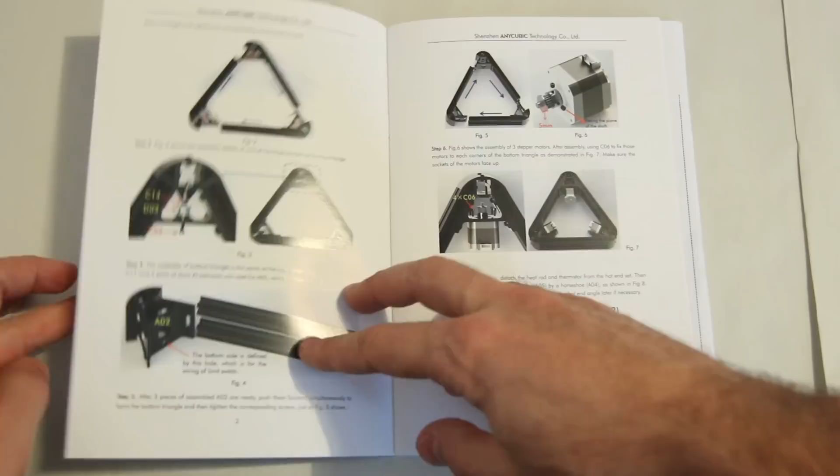I'll just go through it quickly and you can pause the video and watch. Packing list. Assembly of the bottom and top triangles. Extruder: this printer has a metal extruder, which is very good. The head itself is a type of E3D head. There are linear slides and the variant with rollers, but I have bought the linear slide version. It costs about $200.

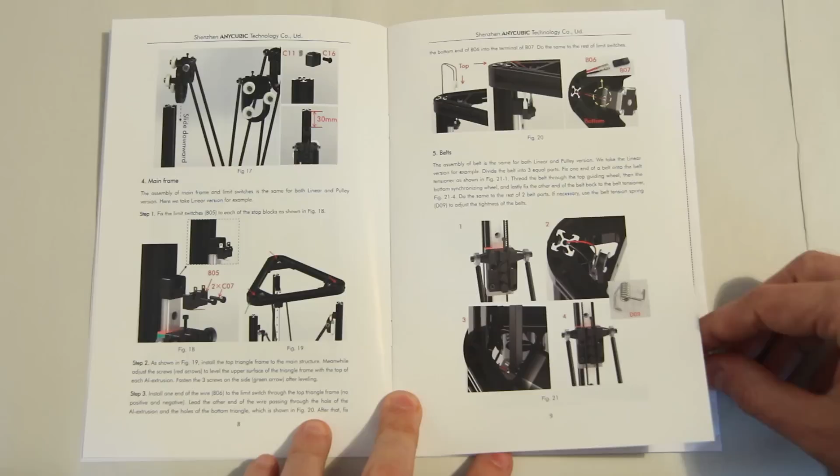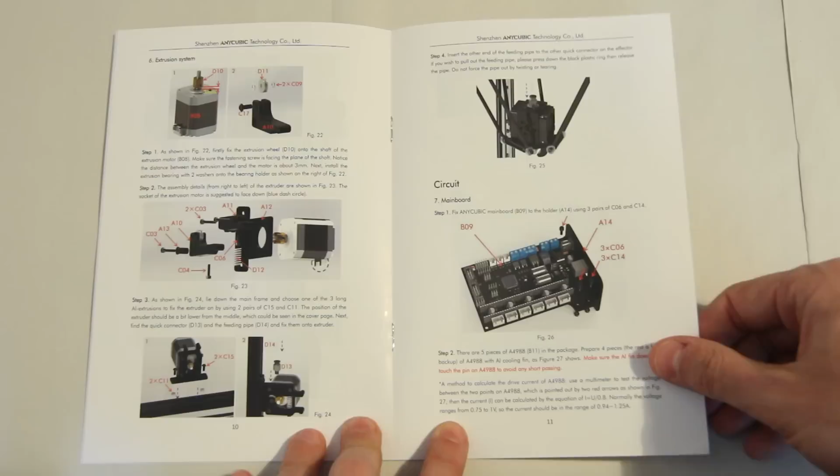Here is the assembly of the end stops. Extruder: the extruder is entirely made of metal, which is very good. The board is a fully integrated board, which is a type of Arduino Mega compatible one with RAMPS 1.4.

Wiring of the board: X, Y, Z axis, and 2 extruders. The kit comes with 5 Pololu-type drivers, but only 4 are needed, A4988 stepper motor drivers. Only 4 of these are needed for this printer because it uses 3 for the axes and 1 for the extruder.

The bed is a piece of glass, but I have also bought the heated bed as an option. It has a display in the kit, 2 lines or 4 lines times 20 symbols each, and then a section on firmware setup, which will come at the end.

And that's it for the other piece of paper which was in the box. Some instructions, with links to videos on YouTube for assembling, as well as a Google Drive directory for the firmware updates that they give. And this is a packing checklist of all the parts in the printer. That's it for now, next we'll look at the parts inside.

I'll zoom in to show you this. Here is the extruder motor, and for comparison, next to it, the motor for the axis. You can see it's significantly larger. They're both NEMA 17 motors, but this one is deeper. Here is a close-up at the writing, if you can see it.

Back to the parts in here. Cables for the stepper motors. Power supply. This power supply is not powerful enough to support a heated bed.

However, you need to purchase a separate one. This is the heated bed, which was an optional part. I bought it separately, even though they now have a version of the printer which has a heated bed by default. I'll set it aside here.

The top triangle, maybe we can position this so they are better visible. The top triangle and bottom triangle. These are normally 3D printed in a typical Kossel, but in fact in this set they're injection molded.

These are the rollers for the top triangle for holding the timing belts. As you can see, these are not the normal ball bearings, two of them. Instead, they are spools with an integrated tiny little ball bearing inside, which I think is very good.

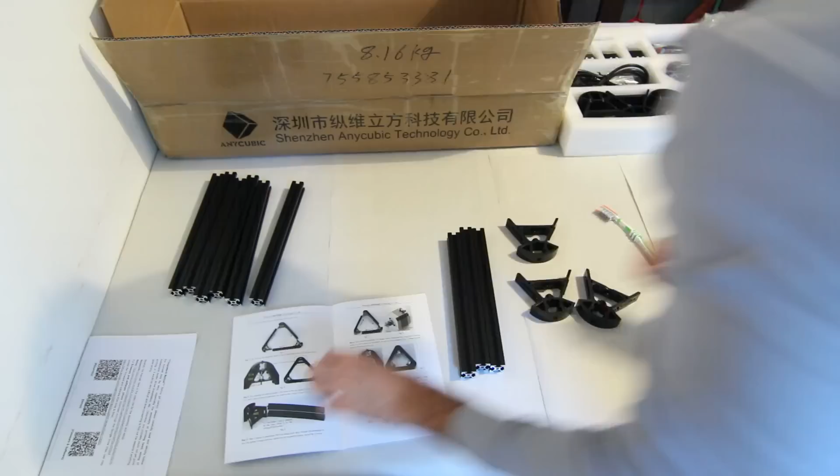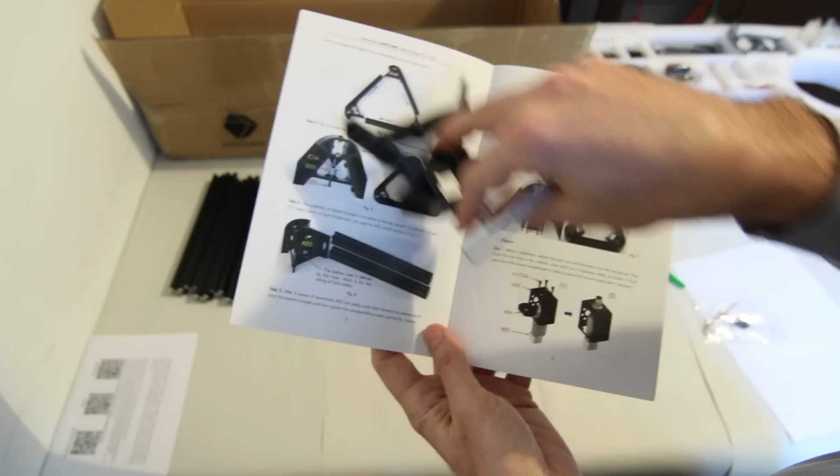So, two important points here. When assembling the top triangle, they suggest that you first attach the corners to the extrusions, make the triangle, and only then install the rollers for the timing belt. However, I think it's more convenient to install the rollers first and then assemble the triangle.

Another point: these injection molded, I think ABS parts, are pretty good but not perfect. There are quite a few burrs in here, like this one, so I'm going to clean them up before assembling the printer.

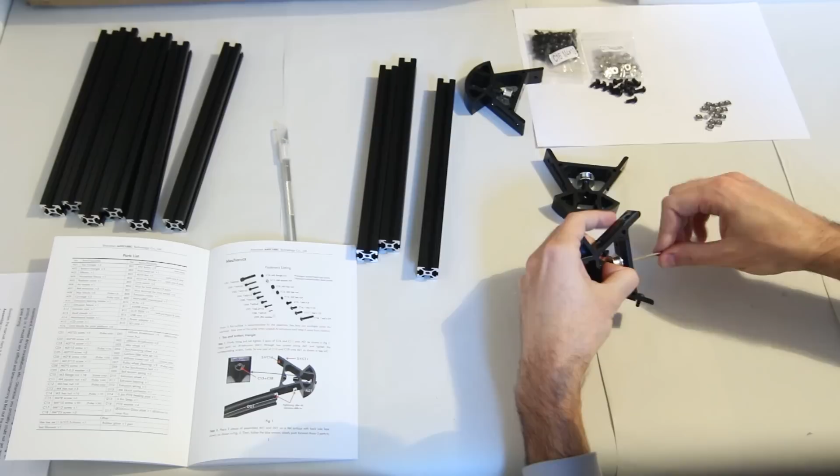So the user manual was right. You cannot put this screw in here - well, it's possible to slip it in, but it would be almost impossible to tighten it once the roller is in place. That's why the rollers should be assembled after the triangle is made, so you'll have to take them off. There was a good reason for this.

Back to time-lapse mode.

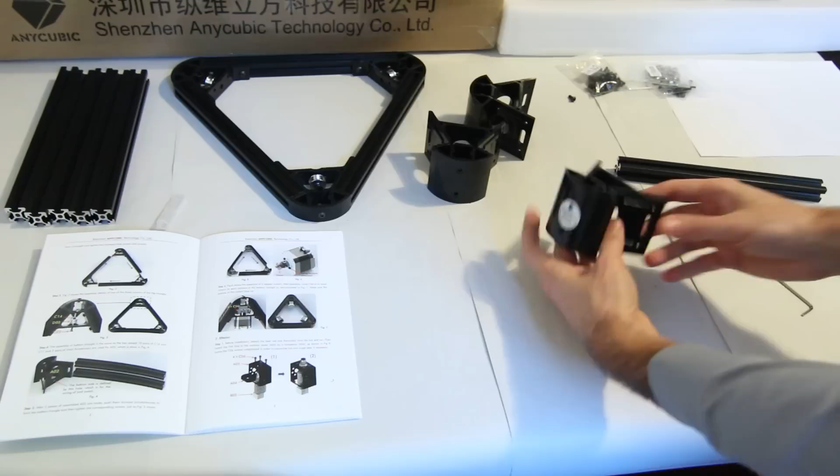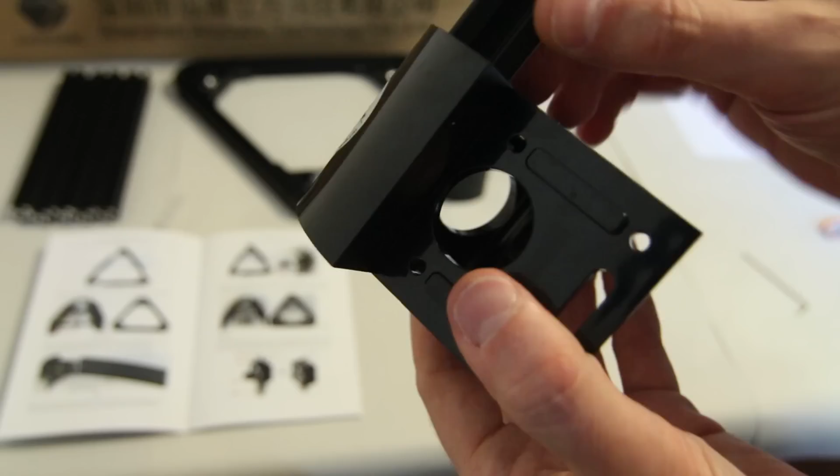The bottom extrusions are much better injection molded than the top ones, and here is a nice touch. The slot for the extrusion has a flange at the bottom, so it actually bottoms out and you cannot push through the extrusion, which makes for a very nice touch because you just drop it in here and it is fixed. And here is another funny part: an actual CE mark on a label at the bottom.

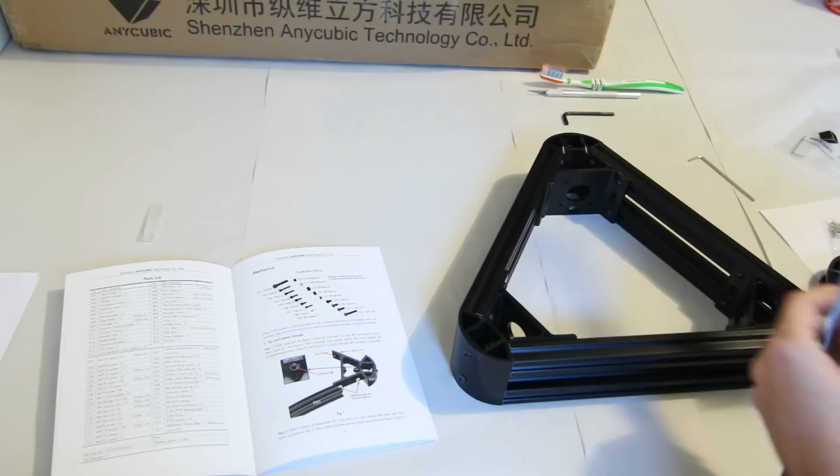So the two triangles, the bottom and top one, are ready. You might have noticed in the time-lapse video that I measured many times from the center of the side of the triangle to the corner. It's critical that this assembly is very symmetric, and in my case they're measuring exactly 25.7 centimeters, or 257 millimeters, plus minus half a millimeter, which I think is close enough.

Also both should be extremely symmetrical to each other. It may seem like this is not a very precise way to compare them, but in fact, by eye and by feel, you can sense very small differences in geometry. And this looks pretty good - they're almost exactly the same.

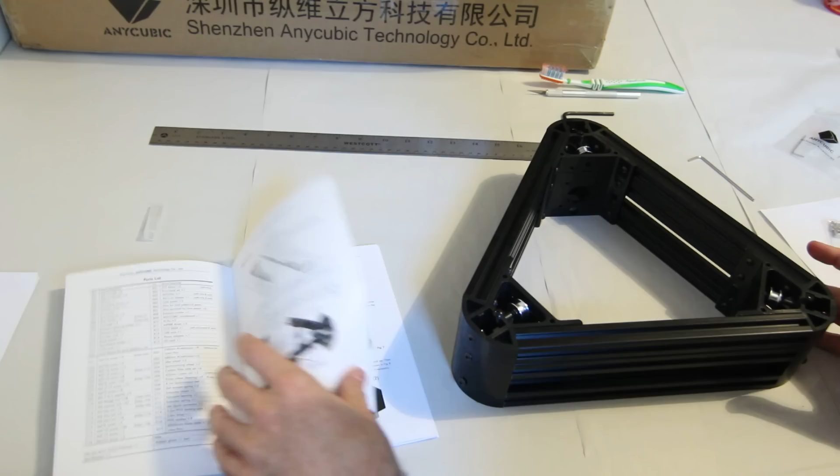These screws here, according to the manual, are intended to be completely tightened so that the vertical extrusion which will hold the top frame is flush with the top surface of the top triangle. However, this is not right. Many other Kossel assembly guides mention that the purpose of these screws is, apart from leveling the top triangle, also to tighten the belts.

So what will happen is I will leave them just barely catching the nut on the bottom - here it is. And then the top extrusion will be about 5 millimeters above the surface of this triangle. Then I will assemble the belts as tight as I can, and using these screws, I will both tighten the belts and make the distance between the top and bottom triangle exactly the same in all three corners. So this is the purpose of these screws.

On the rollers, they're really nice bearings. However, one is turning very, very tight. It's possible that it will start going smoother once it's worked in, but I will consider leaving this nut a little bit loose to allow it to turn very smoothly. I think this will not be a problem for the stepper motor. It's not very hard to turn, but still, this turns the easiest. This is a bit harder, and this actually has a grinding feeling to it when you turn it. However, I don't think this will be a problem.

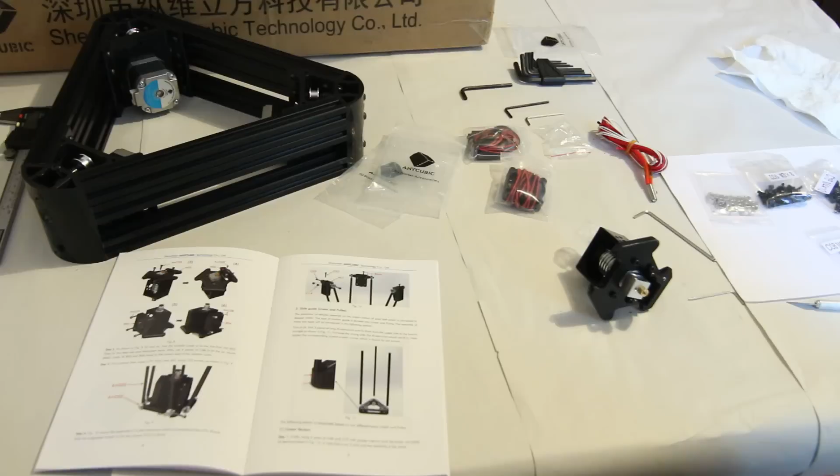A note on the hot end, or really the whole extrusion head. As I mentioned in the beginning, it's completely made of metal, which is very good. This is, I think, steel, cut and bent. You noticed I plugged the top of the extruder with this piece of plastic bag, because if any dirt or metal shavings get in there, the nozzle will clog and I'll have a big trouble after that. So, very good design on the extruder.

As you see, the E3D type hot end with the heatsink attached in here. I don't know if it's possible to see at all, with this U-shaped piece which is screwed to the top with these 4 screws.

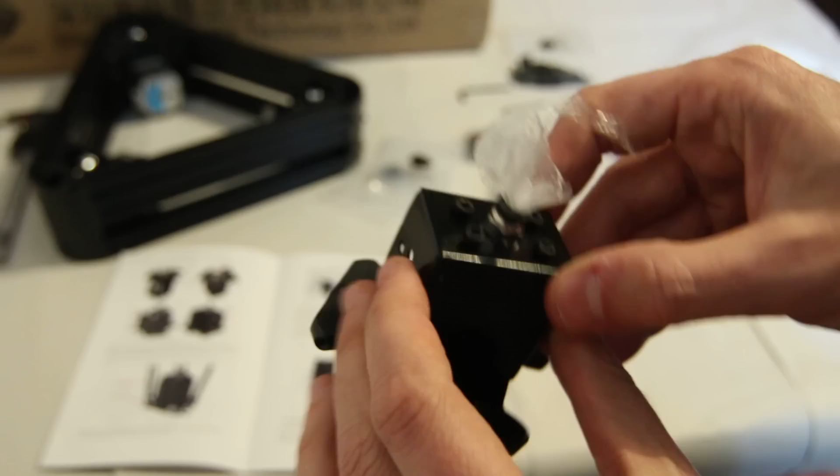The only plastic 3D printed part in this kit is this air guide, which blows directly at the extruded line. You can see it's barely above the level of the extrusion. As usual for 3D printed parts, it took me a long time to align this with the aluminum plate. However, it's extremely well printed - the dimensions are correct, the screw holes matched up perfectly. They were just a bit undersized, which is very normal for 3D printed parts, but otherwise the Anycubic guys obviously know how to 3D print.

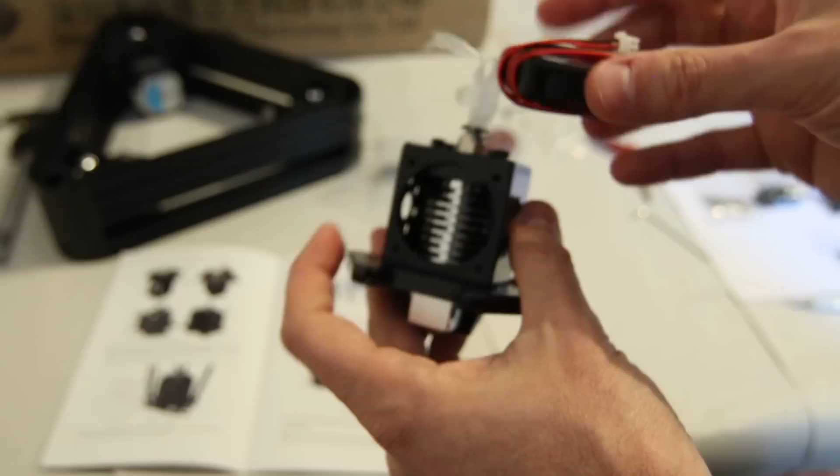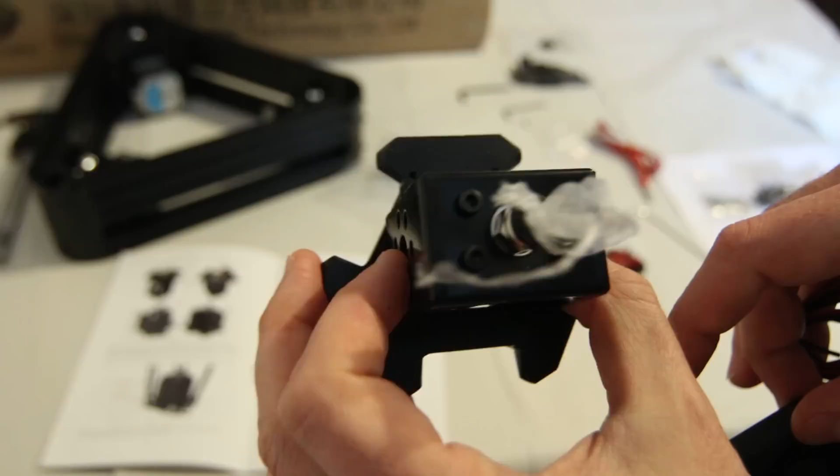The last thing which needs to be placed here are the cooling fans. There are two of them. One, a true fan, goes here and cools the heatsink on the extruder. The other one, a turbine type, sucks air from in here and pushes it out of here, going on here. Do you see this gap? This is the air coming out of the fan, going in here and out of the part cooling nozzle.

Very nice design, I like this. Let's see how it will work in practice, but just assembling it, I see that it's very good. This can still move here because I haven't tightened these 4 screws - the manual mentioned this in order to be able to work comfortably. The nozzle looks very well centered; when I turn it, it doesn't wobble. Overall, the extruder design and the whole printing head looks pretty good.

There is something I should mention here: there is a mod which Anycubic posted on their Google Drive. There will be 2 copper spacers here to make the arms go a little bit wider than they would otherwise, which I think will give them the ability to move at steeper angles and print to the corners of the printing bed. I didn't have these spacers in the kit I received, but I contacted them and they immediately said they will send them with a next order I made for some thermistors for the heating bed. So their customer service is very good so far - they respond quickly, in very good English, and they're knowledgeable.

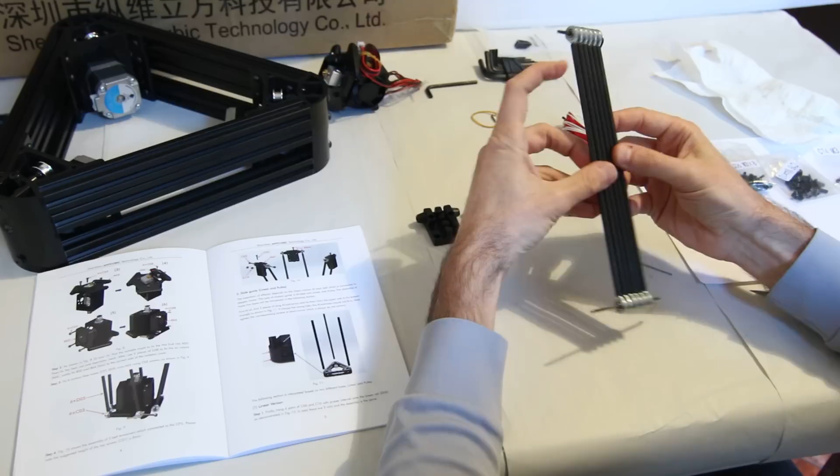The ball joints are glued into the carbon fiber rods with something which looks like epoxy. I put 2 hex keys through all of them and I'm tilting them as much as possible, checking if all of them touch the hex key at the same time. It seems they're all pretty good - when they're all at the extreme end, none of them can wiggle freely, which means they have pretty good tolerance lengthwise to each other. Every time I wiggle this assembly in any direction, it sits perfectly symmetrical, and this is the proper way to do them. I presume Anycubic are using some kind of jig to glue them in place. So my worry was unfounded - they did a pretty good job.

The step I'm going to do now is attaching the diagonal rods to the carriages, or belt tensioners, because the timing belt will come through here, and each rod will be attached like this to the belt tensioner on one side and to the printing head on the other side. Again, they made a change where they have a copper spacer, very thin, about 5 millimeters long as far as I can see from the pictures.

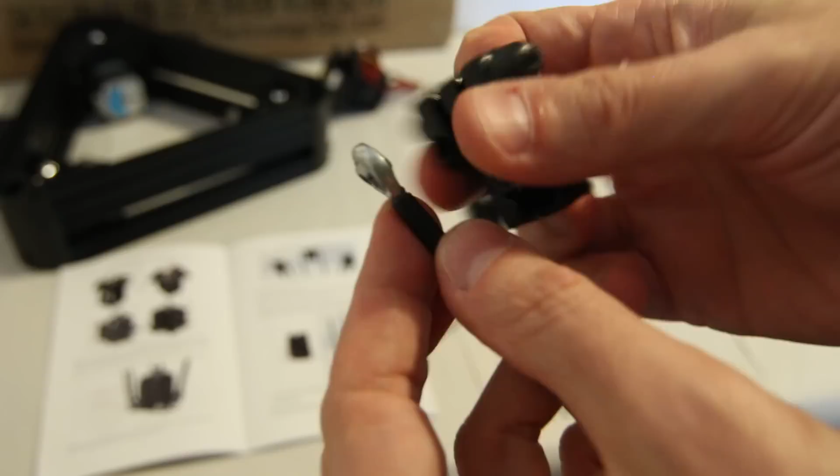The reason they did it is because when the ball joint is on here, there is very little possibility of it to move around, which means the angle between the arm and the carriage can change too little. This means that towards the extreme ends of the printing bed, the body of the ball joint will hit the plastic. So this is the reason they've introduced a spacer here. I don't have appropriate ones to use right now, but they will send me some and then I'll modify the printer.

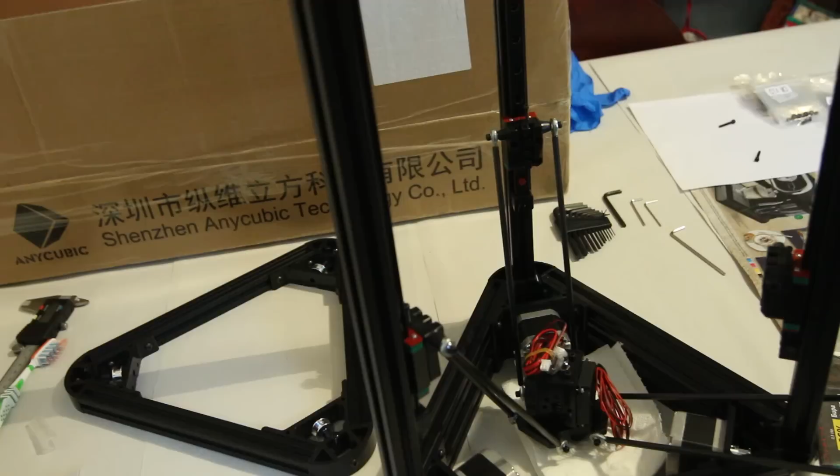So here is an interesting point. The aluminum extrusion allows the linear guide to move quite a bit, since the screws are much smaller diameter than the slit in the extrusion. So I need to find some way to fix this, otherwise when tightening the screw I have no way to guarantee that this will be vertical and parallel to the extrusion, which will allow it to move a lot and will distort the geometry.

So I've made this quick and dirty template which will go into the hole of the extrusion, into the holes of the guide rail, and catch the sides of the extrusion, and this way it will fix it and not allow it to move. I'll attach it at the top, tighten one screw, attach it at the bottom, tighten another screw, and then check a few points along the way.

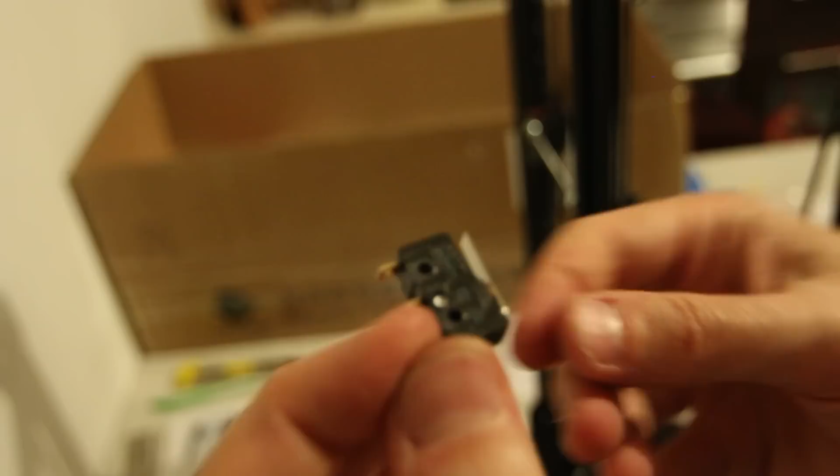Here's an interesting point. The end stop switches, which are mounted here on these end stop mounts - here it is, this is where the switch goes. There were two problems with them.

First of all, the M2.5 screw, which should go into the switch, is too tight and won't actually go in unless you drill it through. But I did that, and that was easy. And the other thing, the head of the screw, when it's put inside the switch like this, it hits the belt, since it's sitting like this here, and the screw actually hits the belt just barely, but in my opinion enough to wear it down over time.

So what I ended up doing is I shaved off these areas on the switch. You can see on this one I've already shaved it off on this side, and I still haven't done it on this side. When you do it on both sides, the screws don't hit the belt anymore. So that's it.

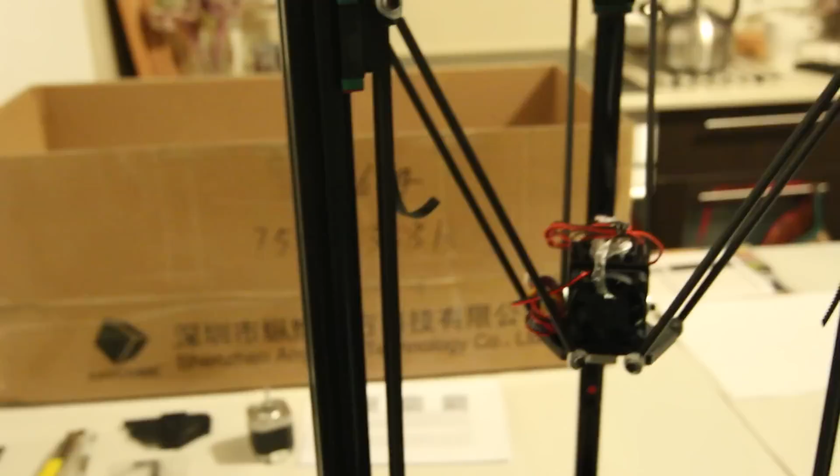I measured the section of the belt which stretches beyond the pulley, and made it exactly the same on all 3 belts. I measured the section of the belt above the pulley here, and made it exactly the same on all 3 belts. And I tensioned them as much as I could without using these springs here.

Which they give as advice for how to adjust the belt tension, but I think that's not a good idea, because if you put these springs on the belt, they make a flexible section which, when the slides are accelerating up or down, allows the belt to stretch a little bit, making it more flexible. You want the guide system of the printer to be as rigid as possible.

For the motion system, I've already noticed what I mentioned at the beginning of this video - the head motion is limited, because when you push it to this side, the ball joint touches the plastic right here or right here, and it's impossible to move further in that direction. Same in this direction, and this limits the amount of travel the head can do around the print plate.

So the way the Anycubic guys solved this problem is with a mod involving inserting these spacers - I'll show you. These are very thin copper tubes, inserted to push the ball joint a little further from the plastic, so that when it twists it won't hit the plastic.

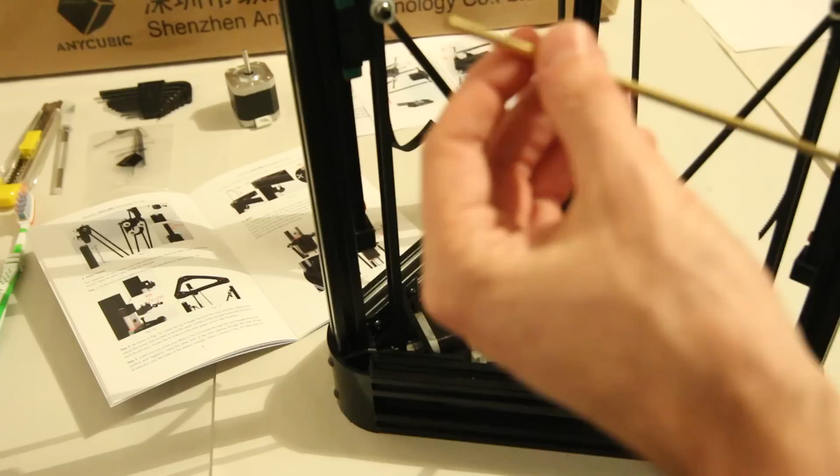I still haven't received the parts. Anycubic will send them to me, because they were introduced on November 22nd, after they had already shipped the printer to me. However, I found a temporary solution - a piece of pipe with internal diameter 3 millimeters, external diameter 4 millimeters, which is perfect. On a lathe, I'll have 5 millimeter sections cut out of it, and I'll use these as spacers.

So this will work. And now the next step in the assembly is the extruder. Here it is, all metal, as I've already mentioned a couple of times. And then we move on to the electronics.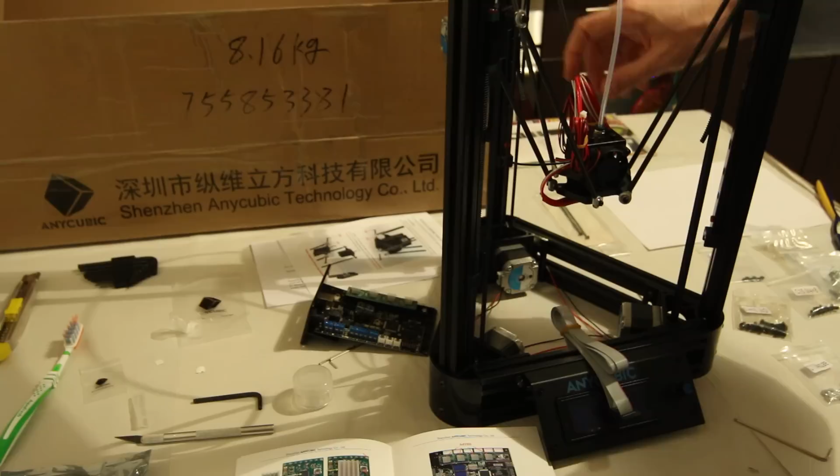So the wires, I'm showing you something which you don't see right now, just a second. I've routed the wires from the extruder to come out on this side, as well as the connector for the wires for the printing head, thermistor, heater, and the 2 fans to come out on this side. I've passed the Bowden tube, which you can see right here, and a little bit up. I've routed the Bowden tube to pass on this side of the column I'll call Z, and the connector on the extruder motor is on this side.

So I will mount the board on this side of the printer as well. This will be my front, so alpha, beta, gamma or X, Y, Z axis. Back to the time-lapse mode.

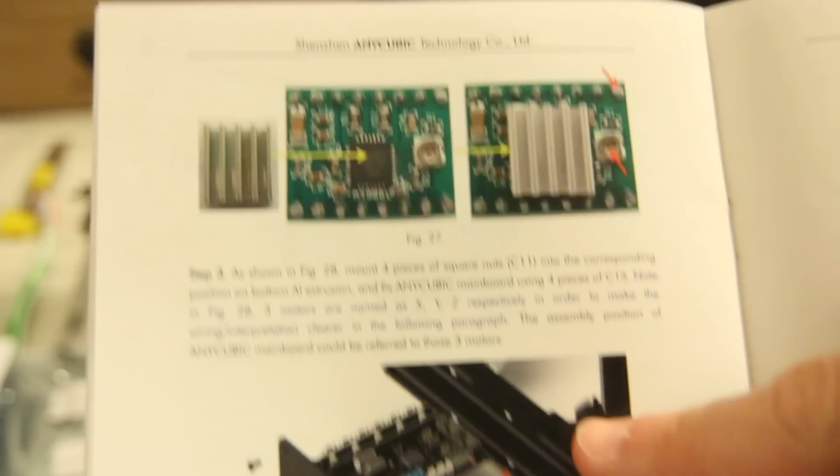So here is a small detail about mounting the board to the plate. The suggestion in the manual is to use 3 screws and 3 nuts back here to do this. However, I think there is a better way.

The board goes on here, and it will be a bit hard to show you this, but the solder joints need spacing, not to touch the acrylic here. So I've decided that I'll put 2 nuts onto the screws first. Here I'll do the 3rd on camera, like this. I do have 3 extra M3 nuts in the set.

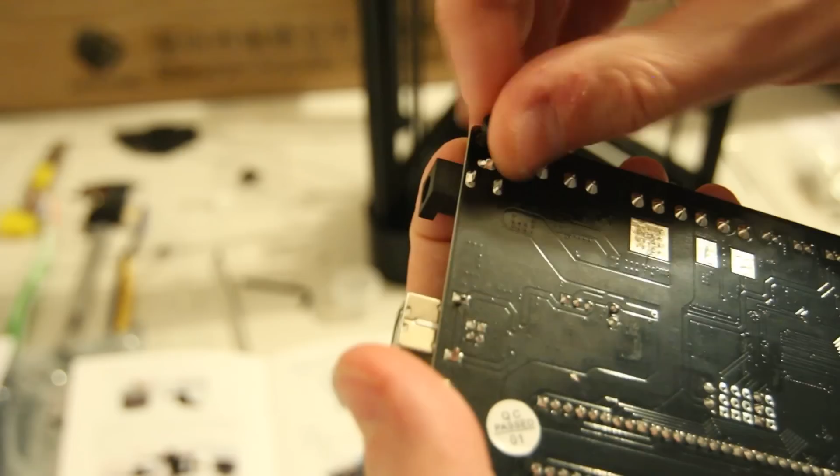Perhaps they were spares, perhaps they were intended for this, but it's not mentioned in the user manual. And if it turns out they were needed for something else, I can always buy more. So I've placed the 3 screws here with a nut on it. And now when I slide the board on, there should be a very nice spacing. However, it doesn't work so easily every time.

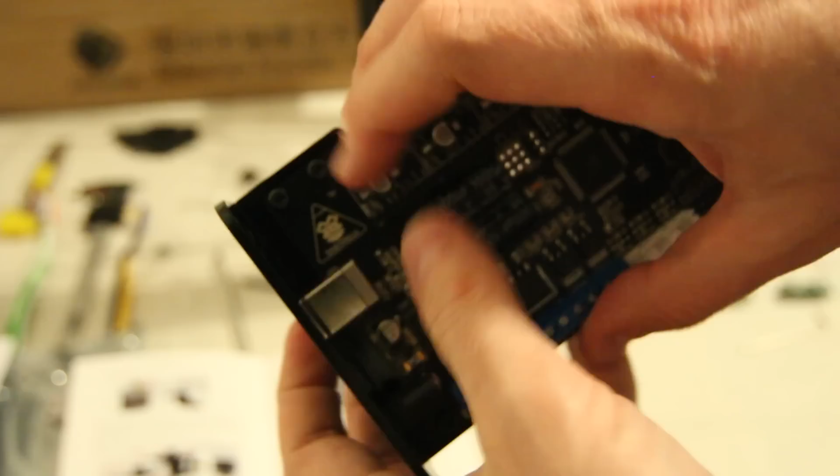So anyway, back to time-lapse mode. You see me mounting the rest of the board into the printer. Here is the part I wanted to show. Nuts make for a nice spacer that holds the board right here, and on the other side right here. So I think I'll leave it mounted like that.

Now it turns out it doesn't work with extra nut spacers, because in that case the board will not be able to fit between the extrusions with an extra nut here, unfortunately. Otherwise it was a pretty decent arrangement, but when I put a nut on here, the whole stack becomes way too thick to fit in the space between the two extrusions, and I don't really want to force it. So I removed the spacer nuts that I placed just a few minutes ago.

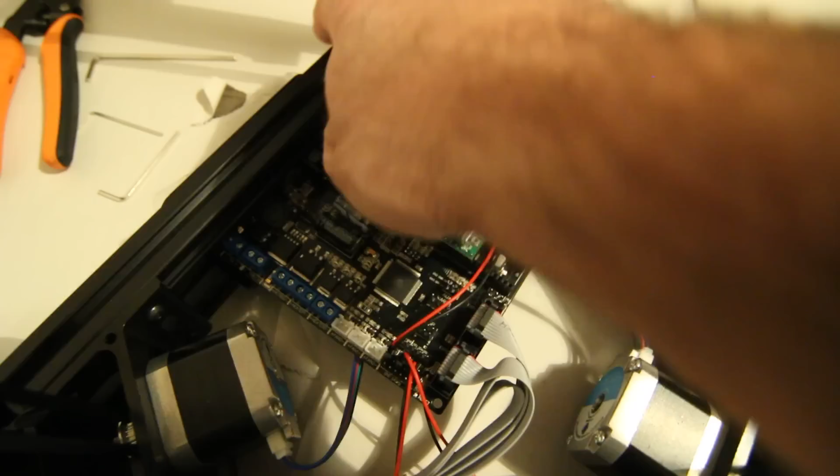Here is a close look at what I've achieved as far as cable management goes. X, Y and Z motors. X goes underneath the board to the connector out here. Y and Z folded in here. Extruder motor cable goes through here, on the outside for a bit, then comes in. I'll try to show you in detail, comes in through here, and then I'll turn the printer around.

Comes out of here, down the side, into the extruder motor, and stops.

Not so hard at all. Z, Y and X - the Y and X you can see here, I've looped them through these slits in the injection molded part, and down there in the dark, if I turn the printer again you'll be able to see it.

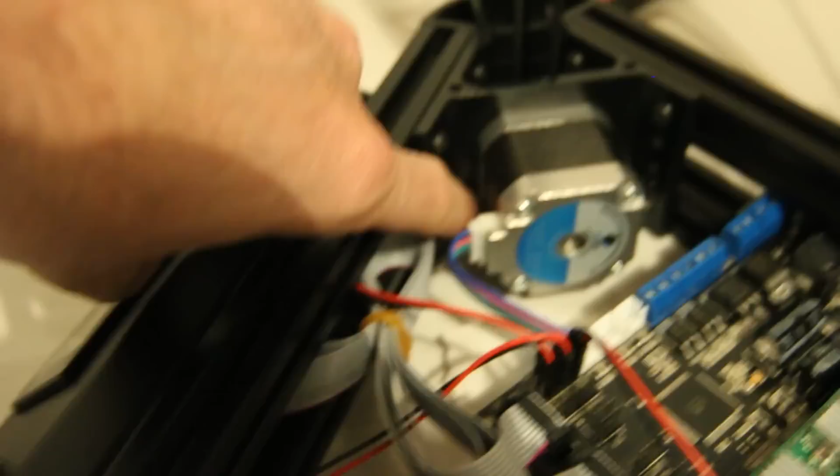Down here in the dark you can see the cable display, and of course the cables for the display going to the board.

That should be all as far as assembly of the electronics. So mechanically the printer is ready. All I have left to do is connect the two cooling fans, the heater and the thermistor for the hot end, as well as install the bed, and then we can start with the electronics.

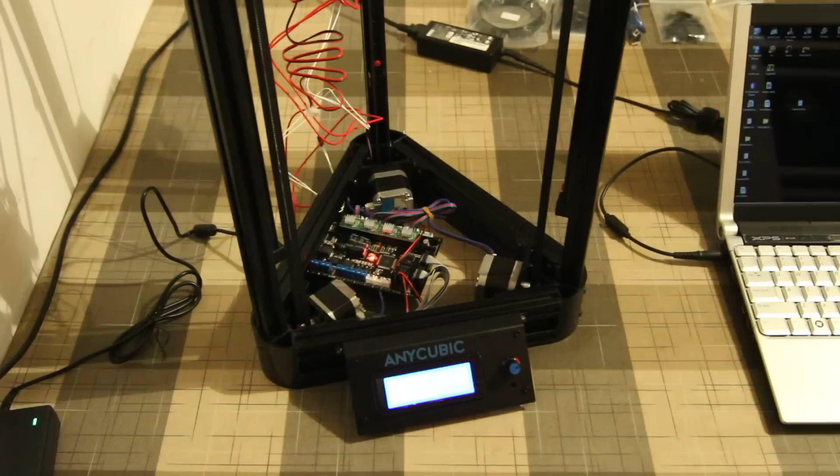A pleasant surprise - the instructions mentioned that I should install the firmware myself. However, when I give power to the printer, I think you'll be able to see, yes, I get a typical Marlin kind of user interface.

Here it is, which means that I have a preloaded firmware. I can change the feed rate, nothing else, as it says min temp, which is the error message for the thermistor not being connected. However, since I intend to install Repetier firmware on this printer, I will override this firmware.

However, I will use it initially to see if my connections are okay, whether the end stops work, and so on. So I will connect the two fans and the thermistor. I'm not going to connect the hot end for now, and I'll try just whether the 4 axes and the end stops work. Another trick I did here -

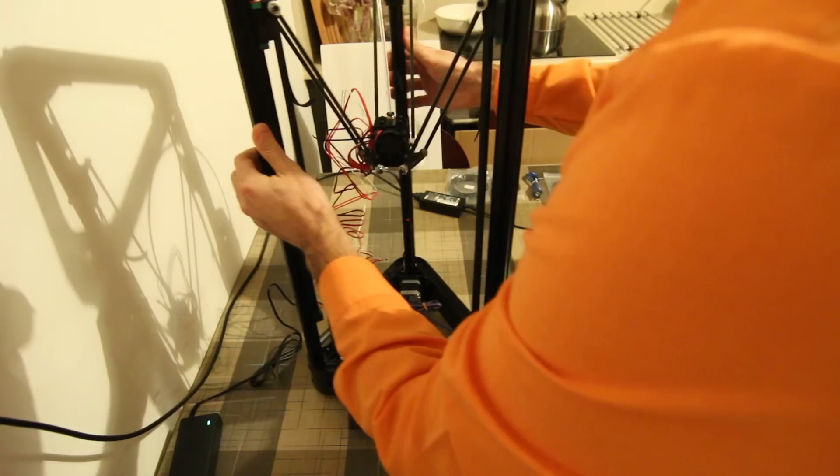When the extruder doesn't have filament inside, the gear is touching the hobbed bolt, which is not a good idea, because if I start turning the extruder, they'll grind against each other. So I use this bottle here, which fits very nicely and allows the axis of the extruder to spin freely. Just as a precaution, because I don't want to put filament in there yet. I want to adjust PID regulation and so on before I'm ready to put filament.

So now into time-lapse mode.

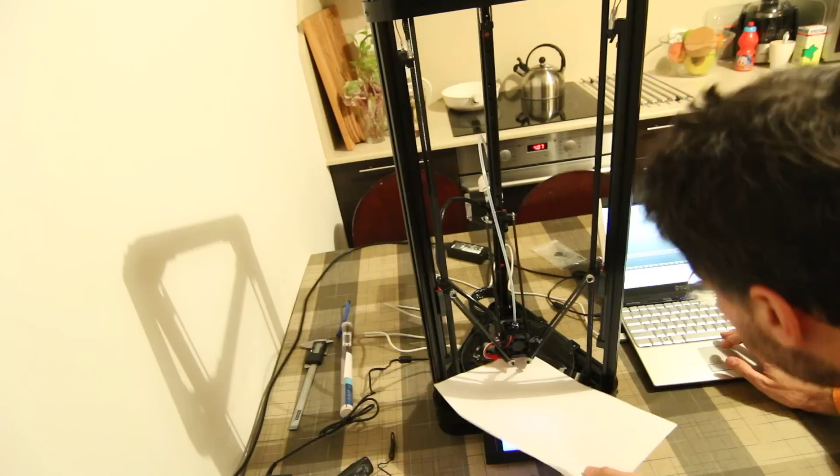I'm moving by 0.01 now. And here is the sheet, slightly dragging under the extruder, which is the perfect bed level.

You see my Z height is 3.25 millimeters, which means that I don't have 300 millimeters, but I have 296.75 millimeters of height. So I'll change the firmware now and we'll try again.

So I'm uploading the firmware right now, and once that's done, we'll try again. Okay, it's almost finished uploading. And that's why adjusting the firmware is so boring - it takes a long time without anything happening. Okay, it's done. I connect to the printer, home the 3 axes, and start down.

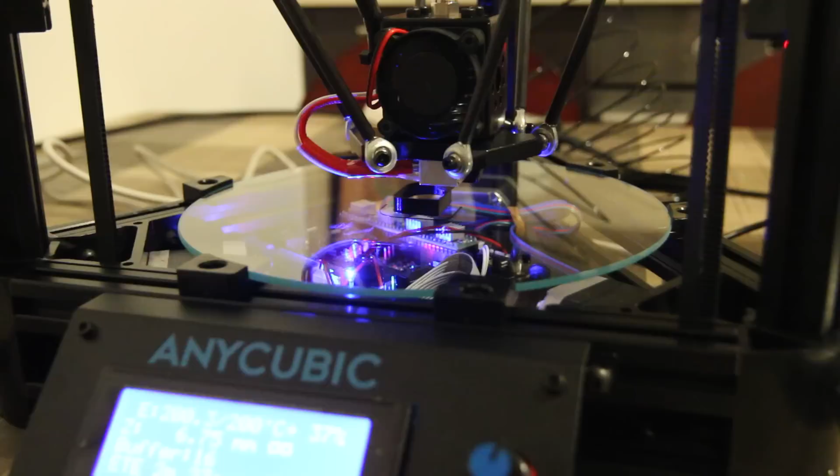And the printer radius influences whether, when you're at 0 at the center of the bed and you go towards the edges, the head can go up, or when you're at 0 at the center of the bed, it can go down towards the edges and actually go into the bed and hit it. So this is a little bit tedious, and I will not shoot a video of this.

And here is the first ever print with this printer, which is almost complete.

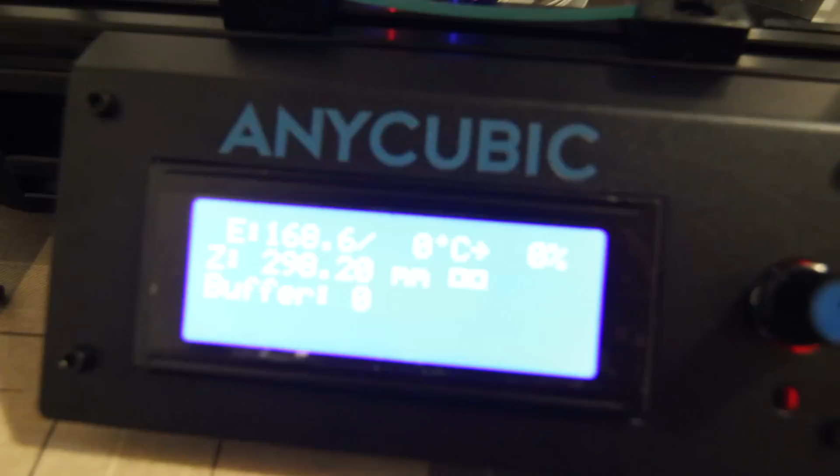I hope you enjoyed this assembly video. Next I'll give you a short summary, so you can watch the printer print this test while I give you a short impression from assembling it.

Overall, the Anycubic linear Kossel is a great kit for assembling a Delta printer. Big advantages: all metal extruder, all metal printing head, cooling fan for the printing head, cooling fan for the part.

The corners, which in a Kossel are usually 3D printed, here are injection molded plastic, looks like ABS. The plate carrying the display is a metal one as well. I will show you right now. I'm talking about this one.

Also, the board, which is called Tri-Gorilla, is an Arduino Mega combination with Ramps 1.4, and it works pretty well as far as I've seen so far. The firmware loaded by default was some kind of Marlin, which was completely non-functional. With quite a bit of digging and configuring, I've made Repetier firmware work perfectly on this board, controlling both fans: the one cooling the extruder here and the one on the other side which cools the printed part.

I'll try to show you a close-up of this very hard to print nicely part. Of course, the stuff on top here is just the layer which was already messed up, but the rest is very, very good. No stringing, no nothing.

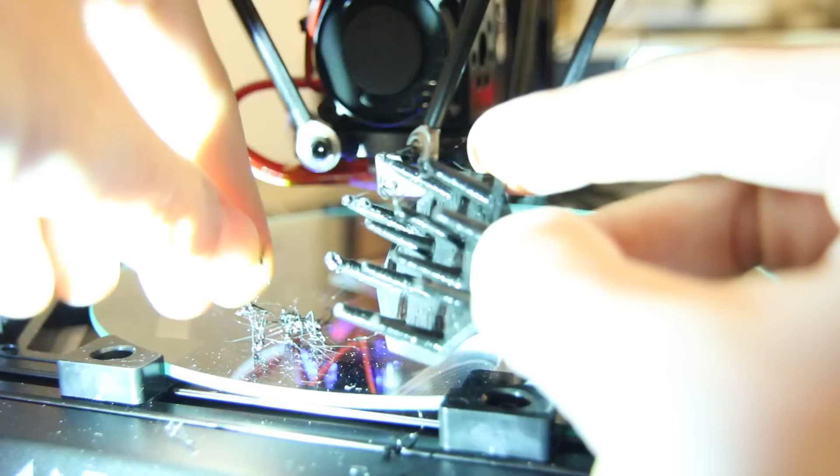It is a bit brighter light, so you can see the details. If I clean up the filament which was deposited after the part detached, you will see how clean it actually is. This is the spot where it actually detached itself. Very, very little stringing and very little problems with it. Very nice.

So, that's all. We'll play with the printer another time again.